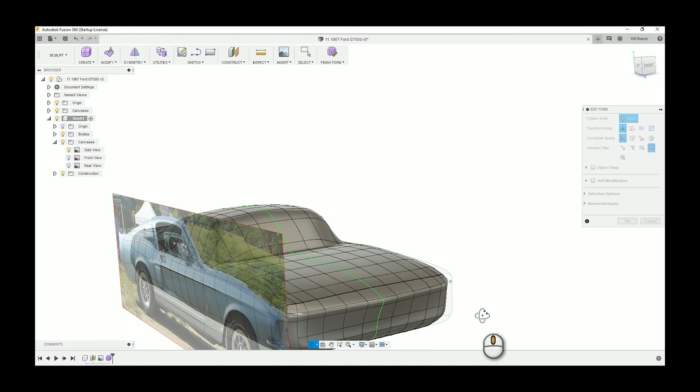Today we'll be covering a few more slight modifications on the entire body, and towards the end starting to deal with the wheel arches.

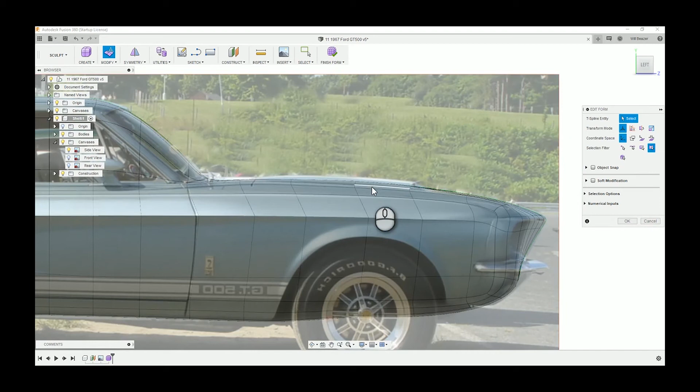So let's begin right at the start. I'm just trying to smooth these curves out, make them less shallow. I don't want anything ridiculously sharp or ridiculously too flat, so just adding some gradient to it all.

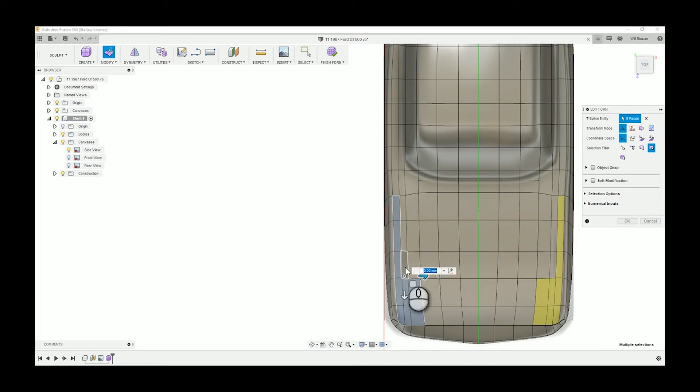A lot of the actual modelling I do in this episode, I'm not looking at canvases so much, and there's a couple of reasons why. Firstly, I've been looking at canvases for a few hours at this point, so I know the features of it, plus this is my favourite car, so I know where the features are anyway. I do a lot of the modelling without the canvases, but the second reason is...

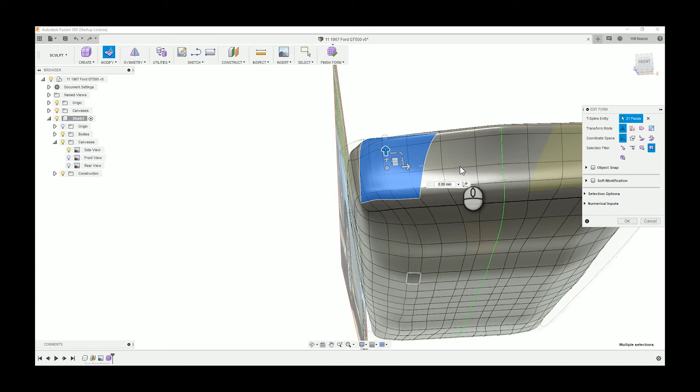You need to make sure your model is working well, make sure the model's curves look fluid. So if the lines on that grid pattern that covers the model are wavy or something, then you're bound to not capture the shape of the car, because when these cars are designed, they don't design them to have weird wavy bits in them.

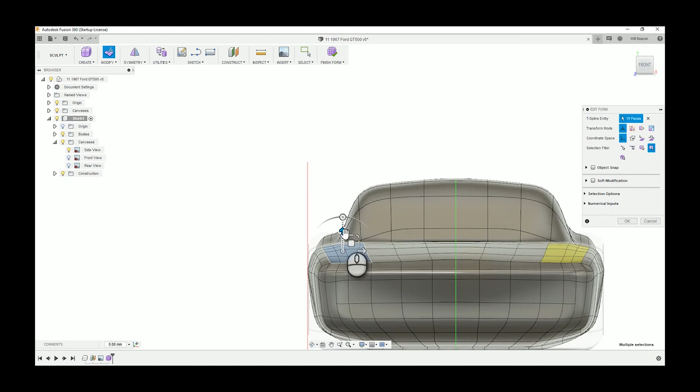So just straightening lines out, raising bits. I know the headlights go here, so I'm raising these bits up, not with any degree of accuracy, I just know they need to be raised, and I'll eventually come back to finishing them off. But I just want to get the car to a point where I can start adding in features such as the headlights, bumpers, windscreens, wheels, wheel arches, exhaust, that sort of thing. So I'm just trying to get to that stage at this point.

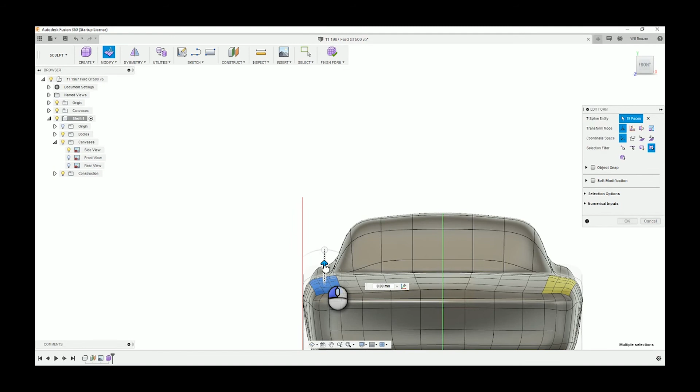Now, one thing I want to mention that I haven't mentioned before is with the points that you drag. When you're modeling the points, you should always try and work away from the center - not front to back or top to bottom, but away from the symmetry line, and I'll explain why.

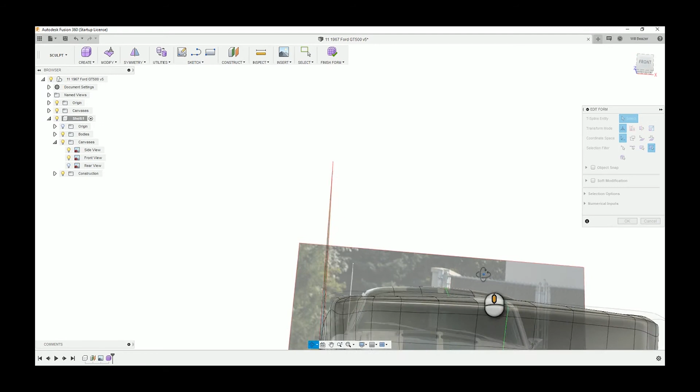If you get yourself an A4 sheet of paper - I've got one right in front of me here - and you place one finger right in the center of that piece of paper, and then place one finger on the outside, and you press down and force that finger to the center, naturally, no matter how small, it will create a wrinkle between the two fingers. It will pinch up, even the tiniest bit of paper, or a massive amount, depending on how hard you've pressed and whether you've pressed from the very outside edge or not.

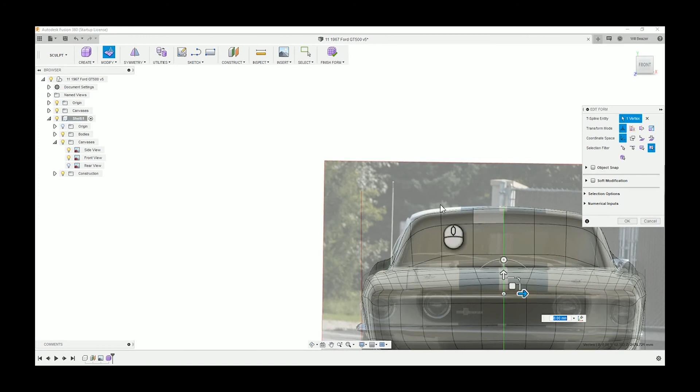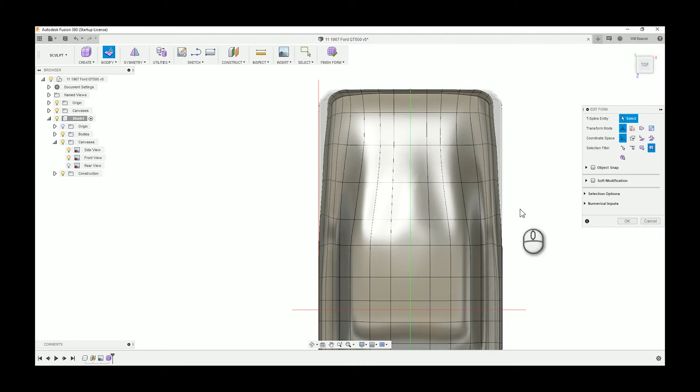But if you do the reverse and drag that finger from the center outwards, away from your other finger that's staying on that center permanently, you take out the wrinkles. That's the same with this surface modeling. If you start dragging your points towards that line of symmetry, it will create subtle wrinkles, and they're a very difficult thing to get out of the model, to unkink them.

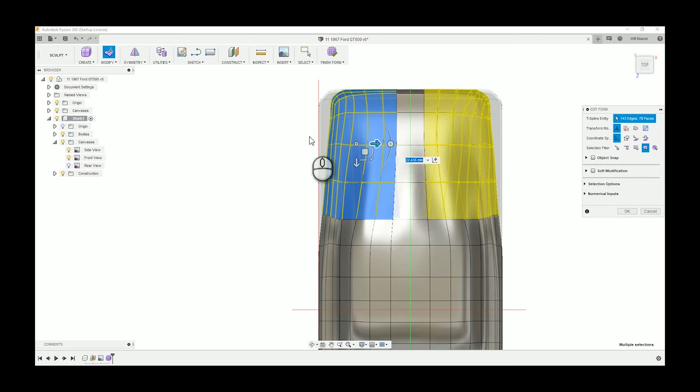So by working away from that line of symmetry, you're a lot less likely to create small little problems. At the time when I was doing this video, I wasn't aware that was happening, but just from experience since, I can say with quite a deal of certainty that you shouldn't be pressing into the middle too much.

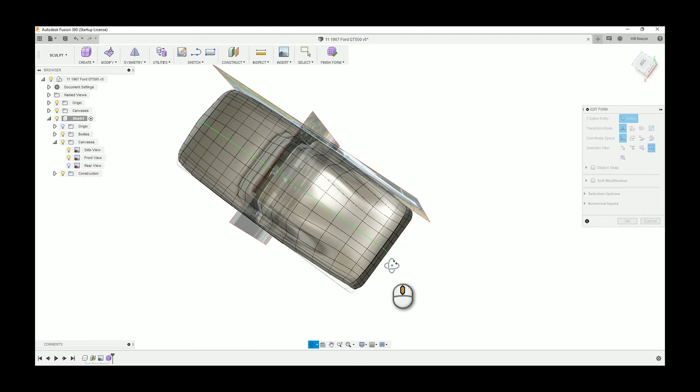Obviously, if points have got to go inwards, then they will go inwards, but try, if you can, to work from the inside to the outside. So work from that line of symmetry, grab the point closest to it, drag it a bit closer in, then step out and drag the next one in, etc. Don't start on the very outside corner and work back into the line of symmetry, because I think you will create yourself a few problems.

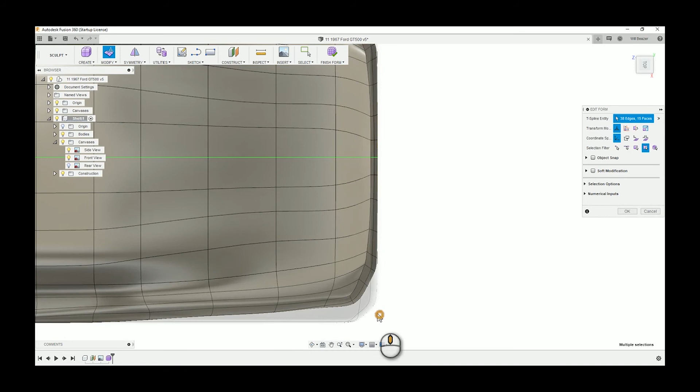I have done in the past, and it's just a pattern that I've kind of seen from it. I don't know if it's a general rule - it doesn't always happen - but I would say it might be good practice to work in that order. So here I'm dragging towards the center. Like I said, because I'm grabbing a huge panel all at once, it's not so much a problem, but if you're grabbing individual points at a time and dragging them towards the center, just work from the ones closest to the line of symmetry further out. I hope that makes a bit of sense.

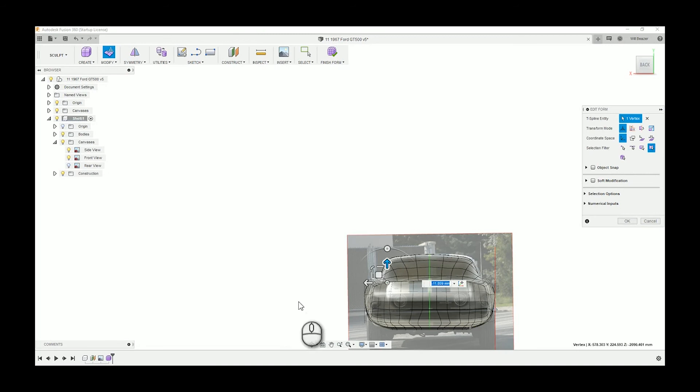So here, just tweaking the model. Like I said, I just want to get it to a point where I can put in the wheel arches, etc. So just lifting that up to match that image line.

See there, I worked from the outside in, and now I've created a bit of geometry that curves a bit high and then dips. So I've undone it, and now I'm doing it in the opposite order. The reason why is, like I said, you just create these small wrinkles, but you will notice they do cause problems if you don't work in the right order.

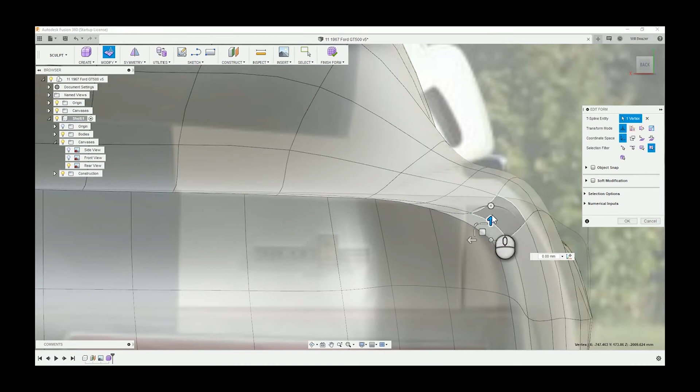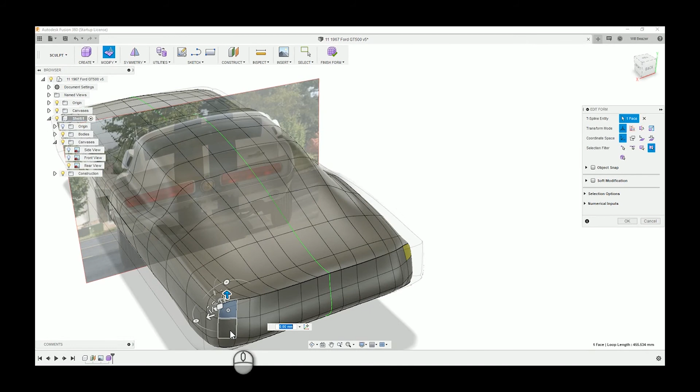So there we go, that matches a lot better to the back of the car. Again, it's not perfect, but at this stage I'm very pleased with how it's gone. The cars that were earlier than this, maybe 2 or 3 cars I modelled before, when I finished the form they'd be covered in sharp edges I hadn't even noticed. But with this, there's none of that. So yeah, just practice makes perfect.

Practice makes perfect. See where that's dipped in the center of the screen, how it curves inwards and then back out again. I don't want that, and the reason it's happened is because I selected the bit on the outside first, and now what I'm doing is unkinking it. But like I said, just don't do it in that order. Do the bits I'm doing now before you drag that outer edge.

Otherwise you create these waves in it, and yeah, it's just difficult.

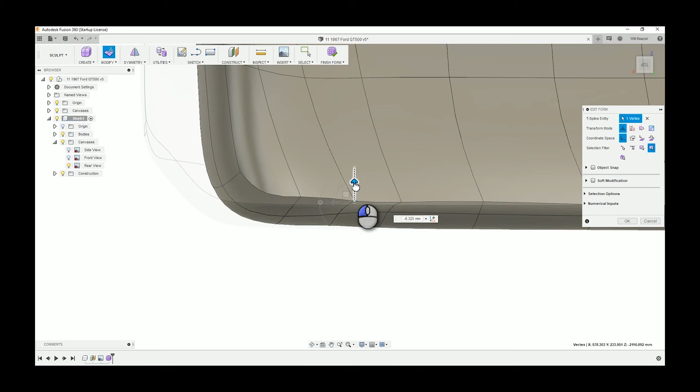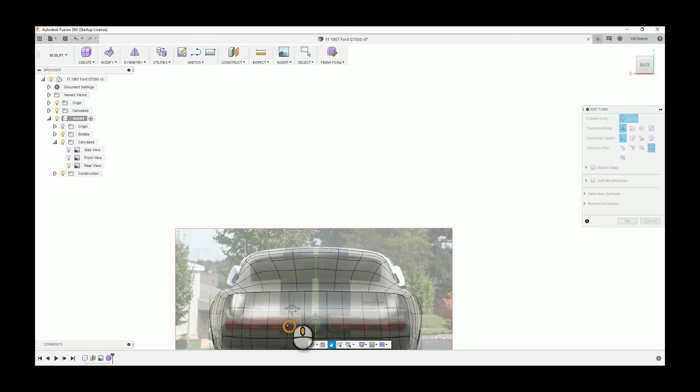Also, just like I said in the last video, remember to show and hide canvases quite frequently. It will just help you discover some issues early on with your model. So yeah.

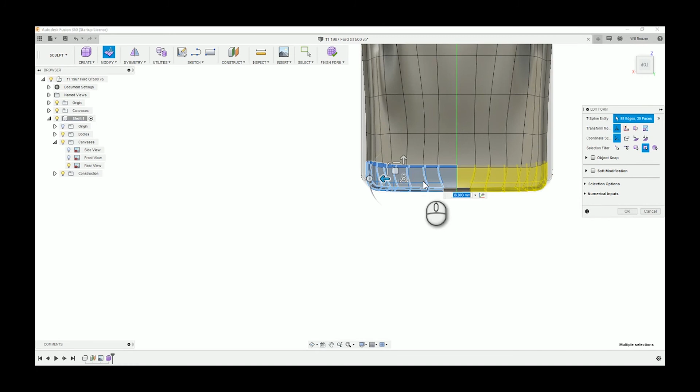Also, I'd like to use a bit of this time to ask if there's anything you'd want to know in Fusion, like a tool you haven't used. I've probably used it - other than the sheet metal workspace, I'm pretty familiar with Fusion now. I think so, about 2 years on Fusion, about 6 on SolidWorks.

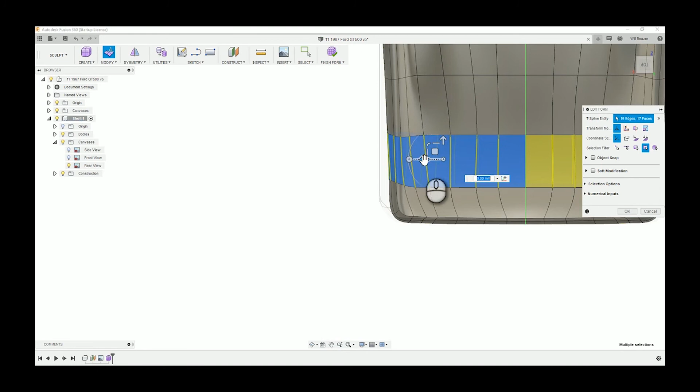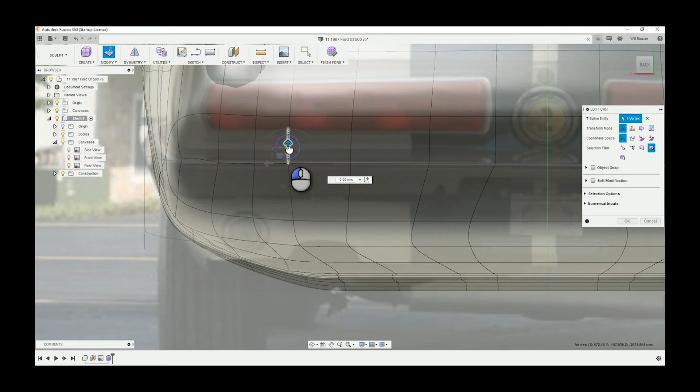So if you've got any questions about a certain tool, or perhaps you're trying to model a car on SolidWorks, you do it a different way on SolidWorks. You use a thing called 3D sketching, where you draw a sketch on one plane, say the top plane, and then draw a sketch on another plane perpendicular to it, like the right plane. Then the 3D sketching tool creates a curve that from the top looks like the curve you've drawn from the top, and from the right looks like the curve you've drawn from the right, and it's this kind of 3D shape - that's how you create panels on the cars. It's a lot more difficult.

I've done it, I did it. I'm trying to remember what car I did it with, but I did do that for a while.

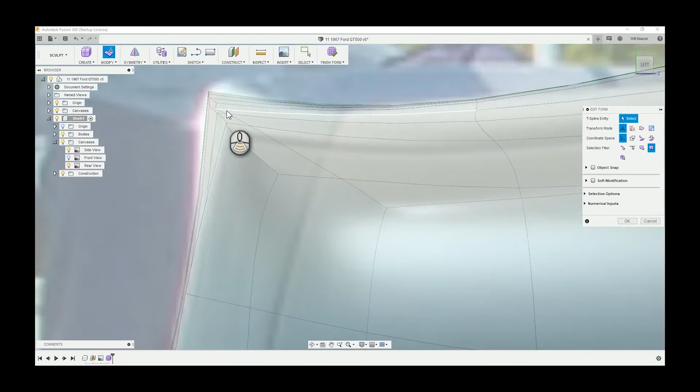So I'd say if you're on SolidWorks and you just want to do models that are a bit easier, or you're not into the very mathematical way that SolidWorks works, then Fusion's a way better program if you're more of an artistic thinker. It has a lot of the features SolidWorks has, but also features like this that are much more suited to somebody used to modeling with clay or something, because that's basically what the sculpt environment is - it's just like working in clay, except you're dragging tiny points.

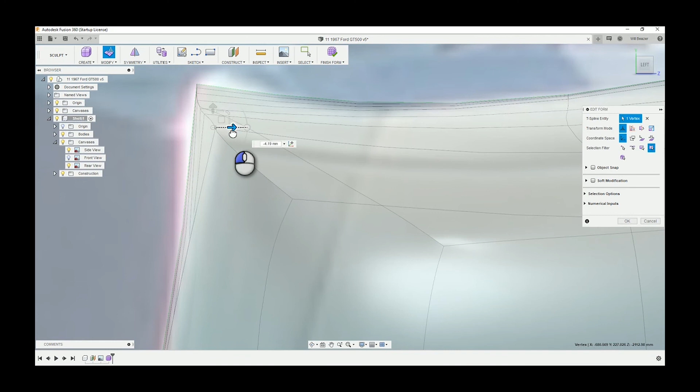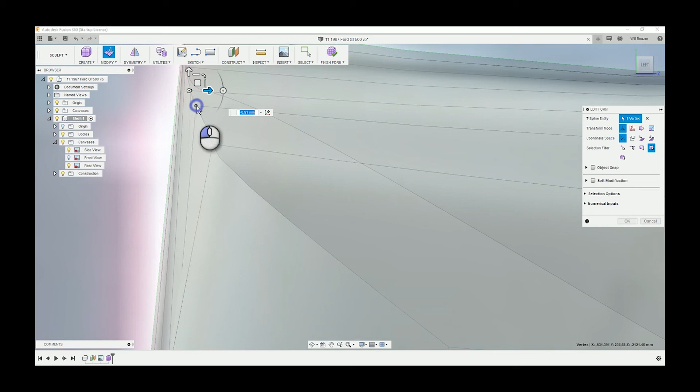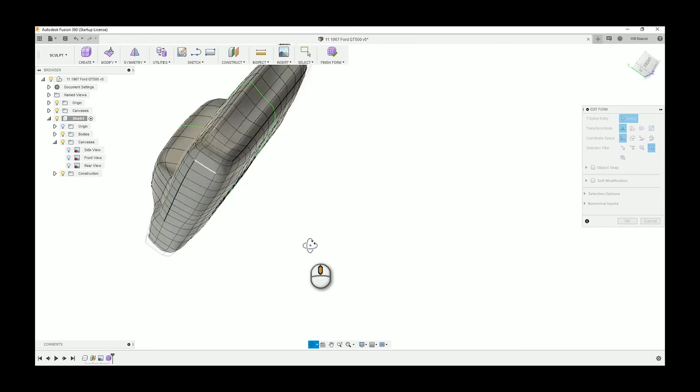So there, just unkinking that edge. Hopefully the videos will start to get a bit more interesting in the ones that follow this as I start to do the rest of the features on the car. So in the past few videos, a lot of it has been just modifying the body, which has to be done, but visually it's not too entertaining. Once you've seen it the first time, once the car is together as one piece, it kind of loses its novelty, I would say. So yeah.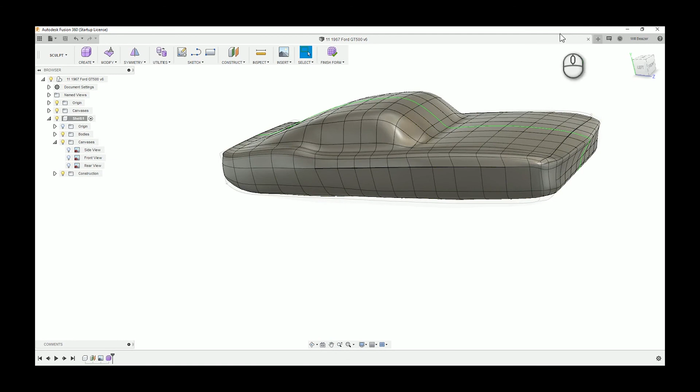So there we go, just having a look at some reference imaging that's not side on to see what we're about to do next. So I think we're about to get onto the wheels. Well, the wheel arches. So this is pretty simple. Once you're happy with your model, at this point you should probably save it. I don't recall saving it at this point, but you should. So yeah, once you're happy with the model, you want to click the finish form button that's at the top.

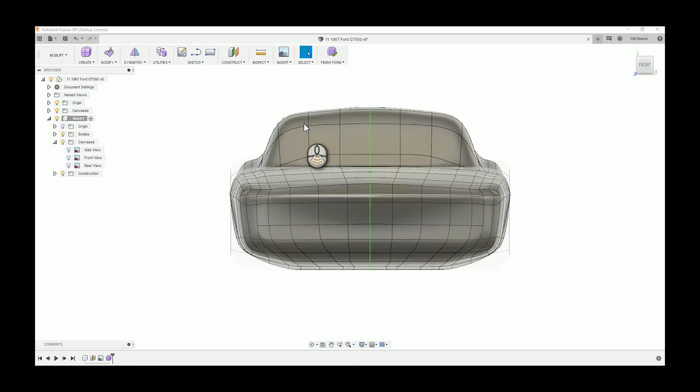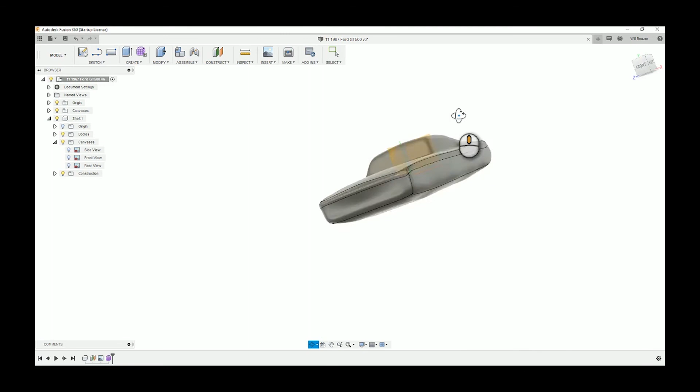Yeah, just checking the model. I think I've spotted something on the windscreen. Yeah, at the top, it kind of dips in a bit. And that's it, looking at the rear. There we go. So once you get to a point where you're happy with the car and you want to start adding the features on, click finish form. The body will now hopefully look like this. See, there's not too many lines on it, which is a really good indicator that the model has been very successful, and is going to be a nice 3D object to work with.

So to do the wheel arches, take this side on image and you create a sketch. Any plane will do. You could draw it right in the center; as long as you're looking at it from this point of view, it doesn't matter. You can draw a sketch on the outer plane, or on one of the planes of the origin, because in the extrude tool you can choose where it starts. You can have an offset from the plane, but in this case I've drawn it from the outside. So now you want to go into the drop down menu and go down to spline, and then fit point spline.

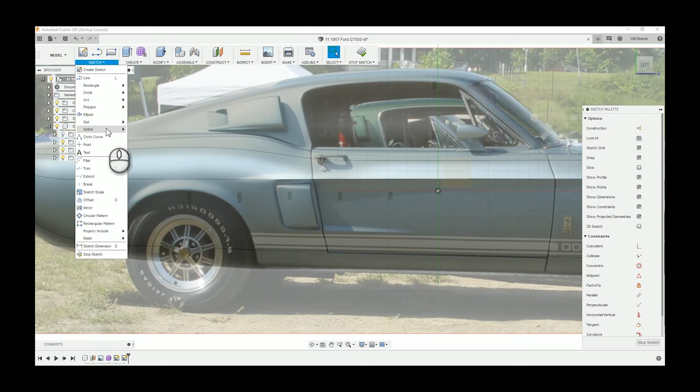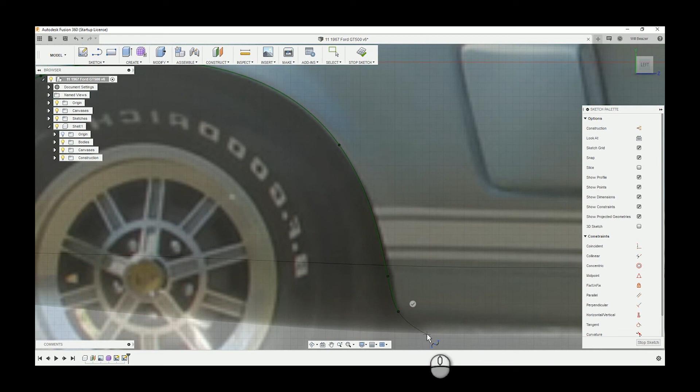Really easy tool, the fit point spline. You'll see straight away. You just click and create points, and that creates this curve. And the best thing about these fit point splines is they're ridiculously easy to edit. So for things like this, they're so quick, so easy. So I just dragged that to the rough shape of the wheel arch, and then by clicking on that select tool at the top, going back to the regular mouse tool, I can click and drag these points, or if I click each point, it comes up with this, and that's how you edit the radius and the angle at which the line comes off. So I'm sure I'll use that tool again.

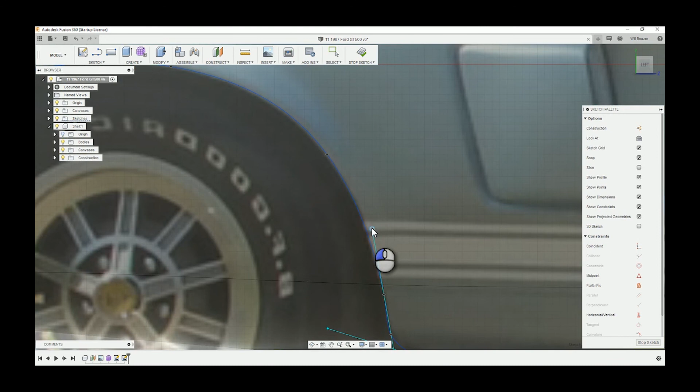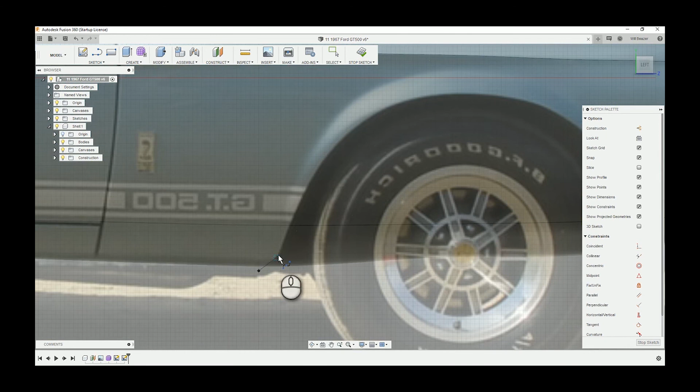Yeah, see here, just dragging that and changing the angle at which the line leaves. You just click and drag to move a point, or click a point and then you get that green line come up, where you can change the angle. Once you're happy it fits the wheel arch, just seal it up so you have a sealed sketch that's linked all the way around so that you can extrude it. And the same is done here, just using that fit point spline tool again, following the shape of that wheel arch. Yeah, really easy tool to use.

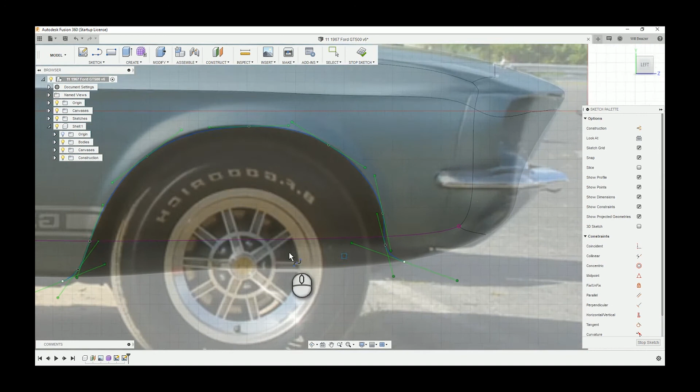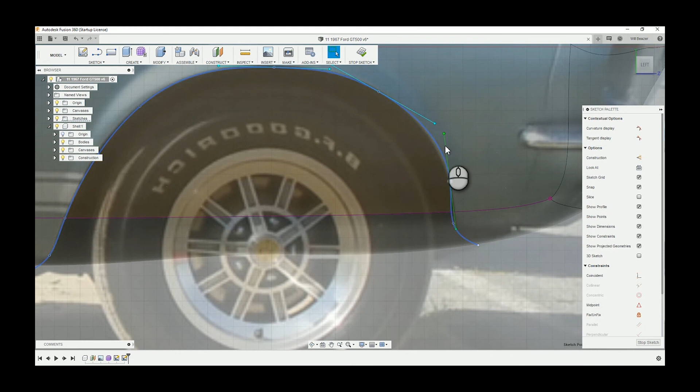What you could do as well is, once you're happy with where the wheel arch is located, you could just fix some of the points, and then you've got no worries about this sketch ever moving. I don't bother in this because it just saves me time mainly. But if you were working for a company, you definitely want to dimension this, because if you move something, it'd be really difficult to tell you've moved it until a very late stage in the project, by which point you probably get a bollocking. So if you click on a point and then right click, you get a drop down menu. There's a tool that says fix, or actually it might be anchor.